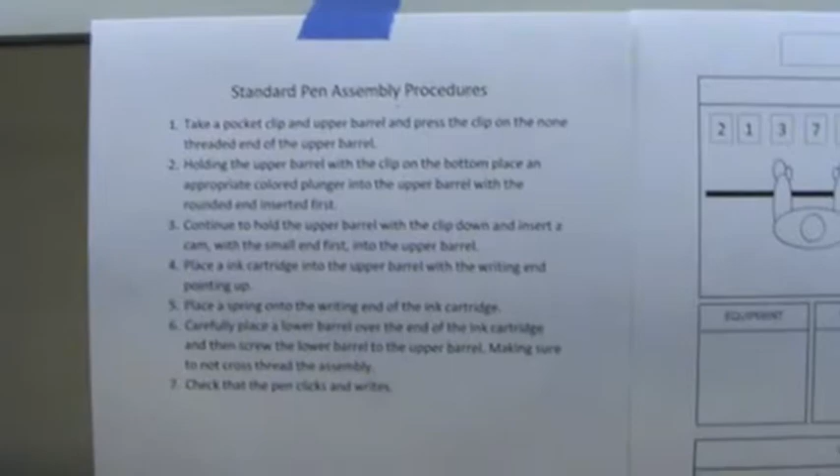Okay. Go ahead and talk about it.

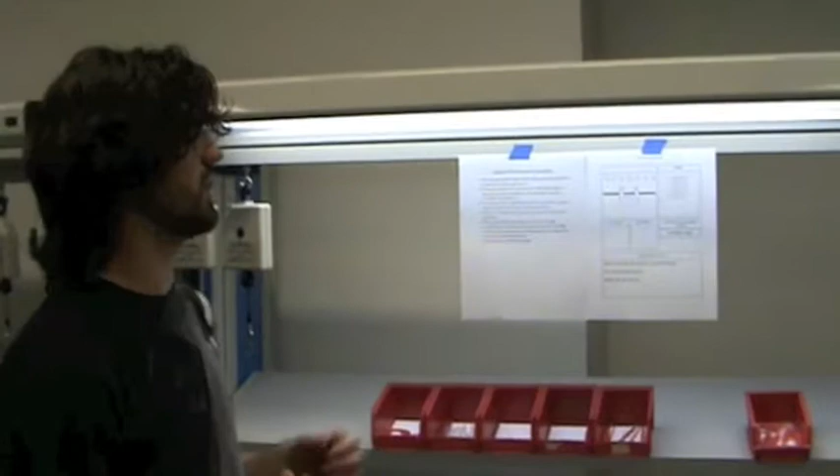So, our standard pen assembly procedure: first we're going to be taking the pocket clip and the upper barrel and press the clip into the non-threaded end of the upper barrel.

Holding the upper barrel with the clip on the bottom, place the appropriate colored plunger into the upper barrel with the rounded end inserted first.

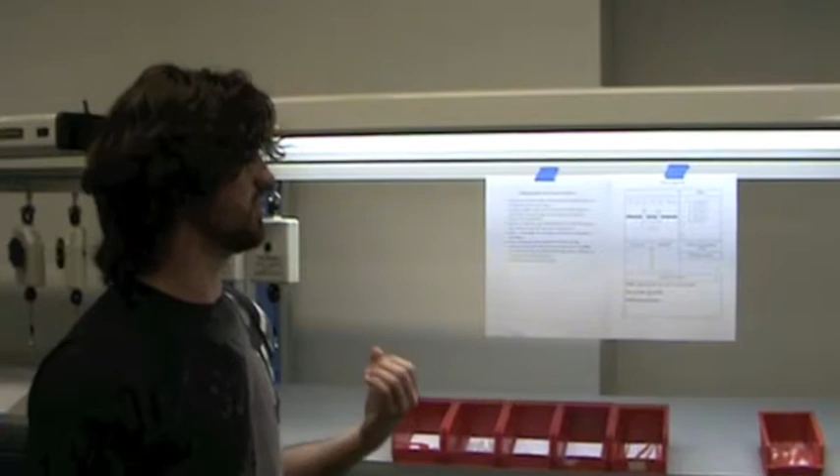Next, continue holding the upper barrel with your left hand and then place the cam with the small end first into the upper barrel.

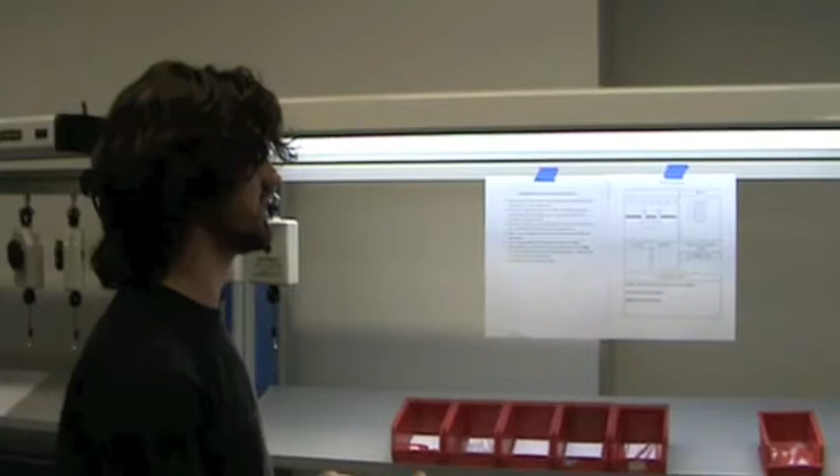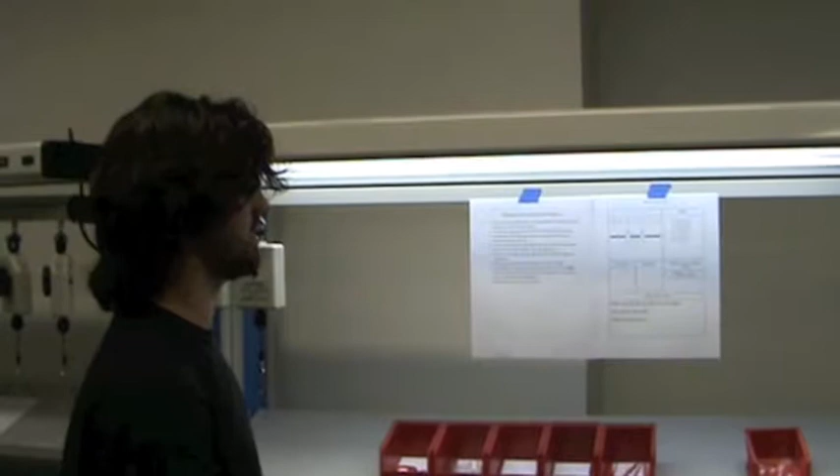Then you're going to take the ink cartridge and put it into the upper barrel with the writing end pointing upwards. Then you'll grab a spring, put the spring on top of the writing end, and finally take the lower part of the barrel and assemble the two pieces, and check that the pen clicks and writes properly.

We changed our procedure a little bit so that you can do everything while holding with the left hand and then do each procedure with the right hand, so you don't have to waste time setting things down and picking them back up.

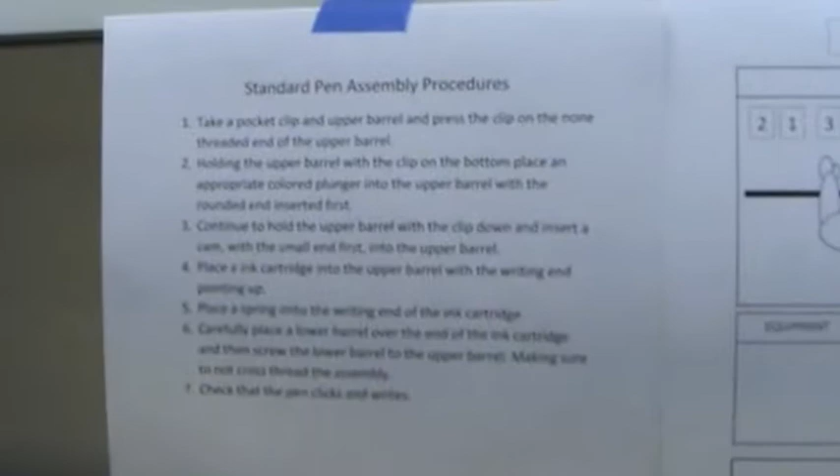That works. Okay, and here is our procedure for the pen assembly that he just went over, and the layout of our work area, part numbers, and the bins.

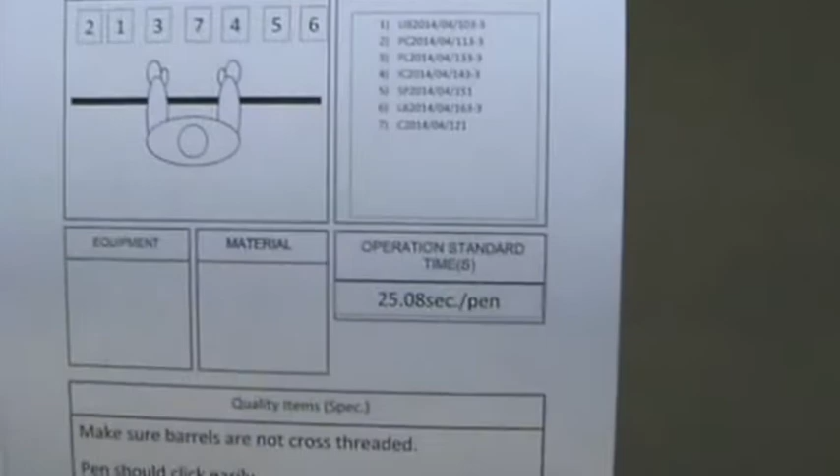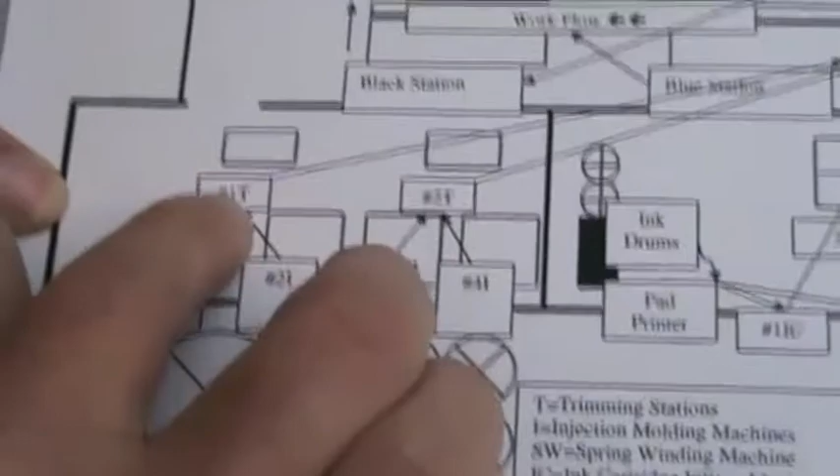They're supposed to be up here, but they feed the products from there, which will go to these two trim lines. Once the parts are trimmed and cleaned up, they will go over here to the finished parts.

The ink drums will feed the ink cartridge machines. They will fill the ink cartridges for us, and then those will be shipped over to the finished parts.

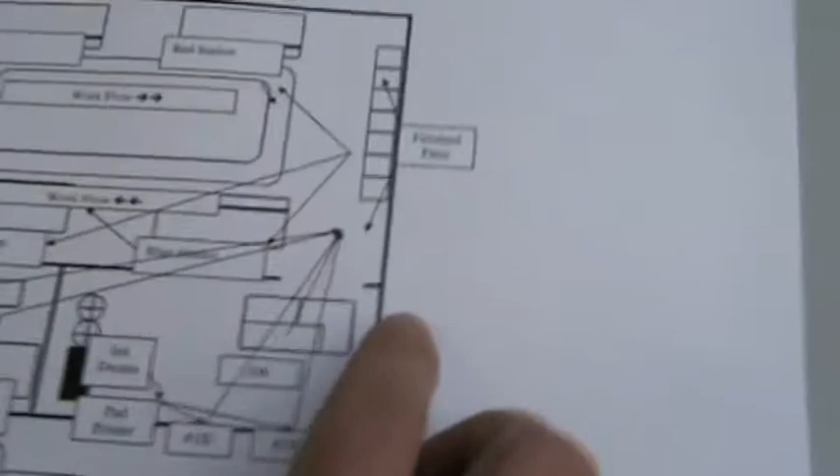Right here is the spring winder producing the springs, and when that is done making the springs, they move over to the finished parts. Once we have all the finished parts that we need, then the finished parts will be distributed to the stations.

The finished parts will be distributed to the red station, the blue station, and the black station to produce the red, blue, and black pens. From there, those parts, once completed, will be sent over to shipping and receiving to be shipped to our customers.

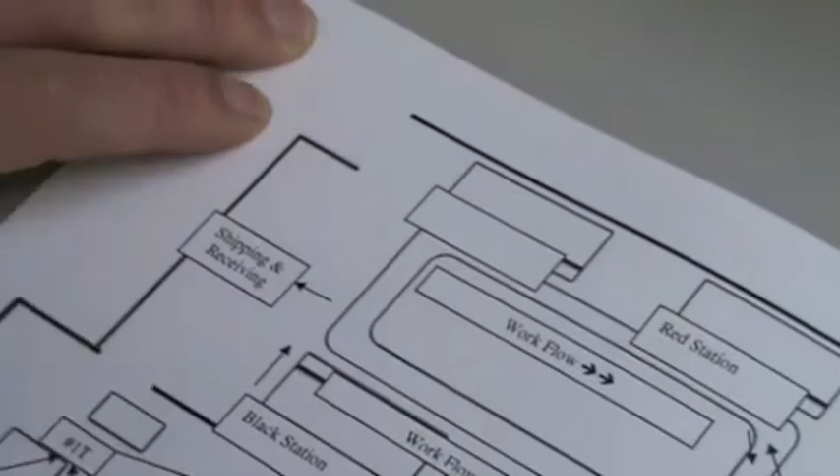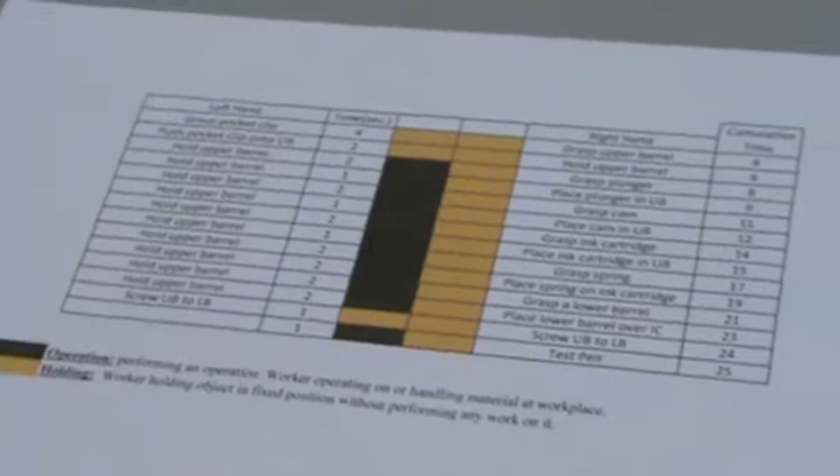Here is our left hand and right hand chart, showing what each hand is doing throughout the operation. As you see, our left hand tends to just be holding the barrel, so it's not being really utilized in a good way, while the right hand is doing most of the work.

And here's just a little close-up of each chart.

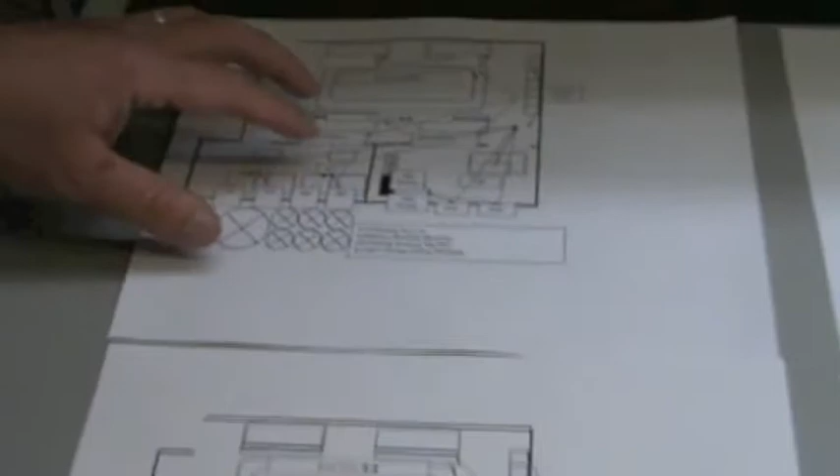Okay, this is our original floor plan. One way we felt we could possibly improve this is if we could move the red station over here in line with the blue and the black station.

Instead of having a circular belt moving around, if we just had a continuous straight belt, the finished parts would come in here and you would put your finished parts on the belt to go to whichever station they need to go to, as that station needs more parts, using the kanban cards.

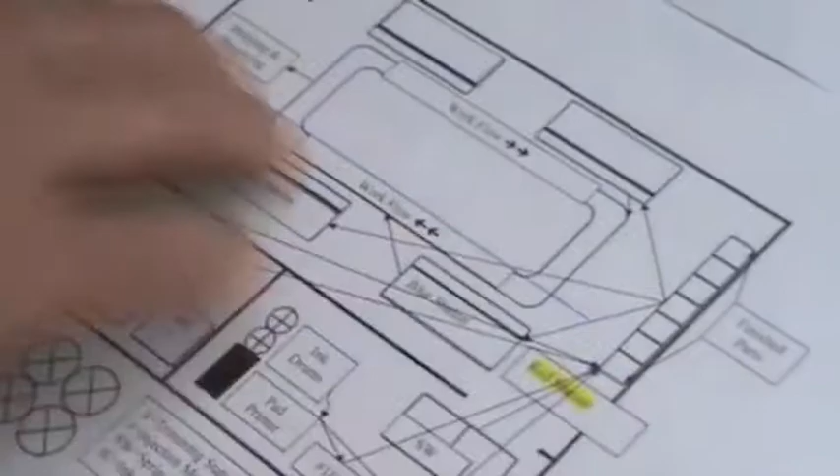Once that station gets their parts, they make their pens, put them on the assembly line. A person here would collect those finished containers as the red, blue, and black stations completed what they needed to produce, and then they would go out to shipping. This would prevent the conveyor belt going around and have everything more linear.

On the process chart, if we had a jig to put the upper barrel with the pocket clip - once the pocket clip's attached to the upper barrel, if we had a jig to hold the upper barrel straight up and down, then we would be able to assemble the parts using both hands, which would cut down on the amount of time it took to make a pen, and we could save approximately 3 seconds by using both hands. Our right hand, left hand chart kind of shows us what both hands would be doing.

As you see in this chart, how much all this black is idle time for our left hand, whereas if we had a jig that would hold it up, we could utilize more time with our left hand and cut down on the amount of time it takes to produce each pen. Again, just another close-up of the improvements.

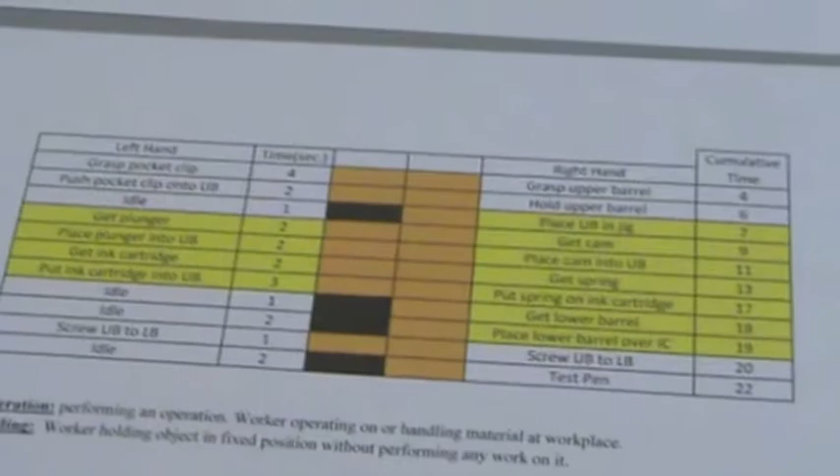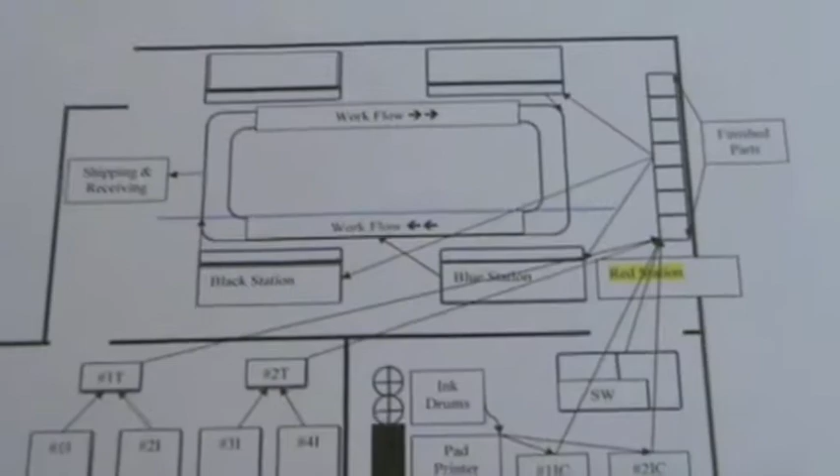In conclusion, through work systems such as Lean, Six Sigma, and time studies, one can increase efficiency of a process, which can lead to increased capacity as well.

One recommendation would be to have a linear conveyor belt instead of the circular one, so that after a product is finished, it goes straight to shipment and doesn't go around the circuit again if it's missed or anything like that. Although work systems increase efficiency, it doesn't just stop there.

Work studies can only do so much. One must combine work systems with new technologies in order to reach the highest level of efficiency and capacity.